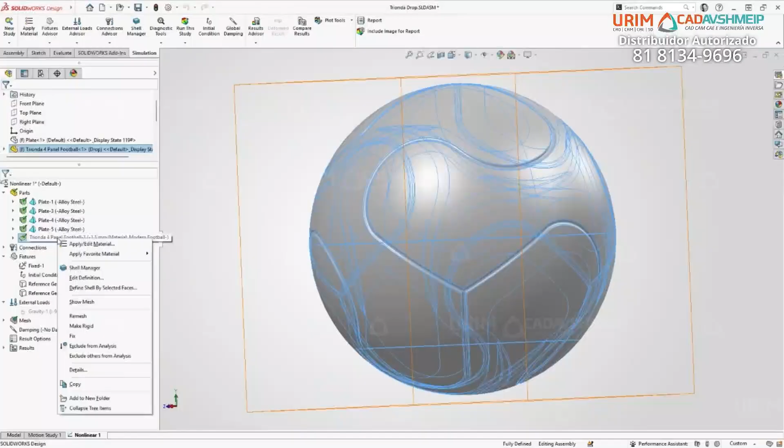The modern polyurethane ball and the dry, older leather ball share similar stiffness characteristics. But wet leather is a fundamentally different material. When leather absorbs water, it becomes dramatically softer, up to 5 times less stiff than when dry. The measure I care about is simple. How much of the energy from the kick does the ball actually return? A stiff ball gives it back. A soft one absorbs it.

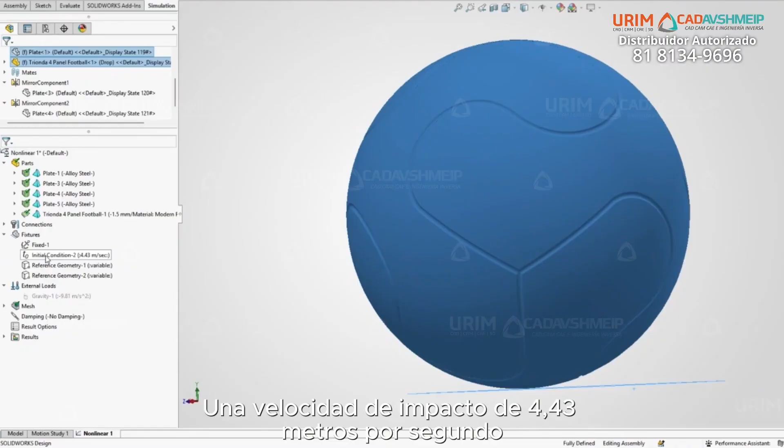This is exactly where SolidWorks Simulation shines. I'll set up a nonlinear dynamic analysis. The ball is modeled as a pressurized shell, the plate as a rigid body dropped from 1 meter, an impact velocity of 4.43 meters per second. 3 balls, 3 materials, same setup.

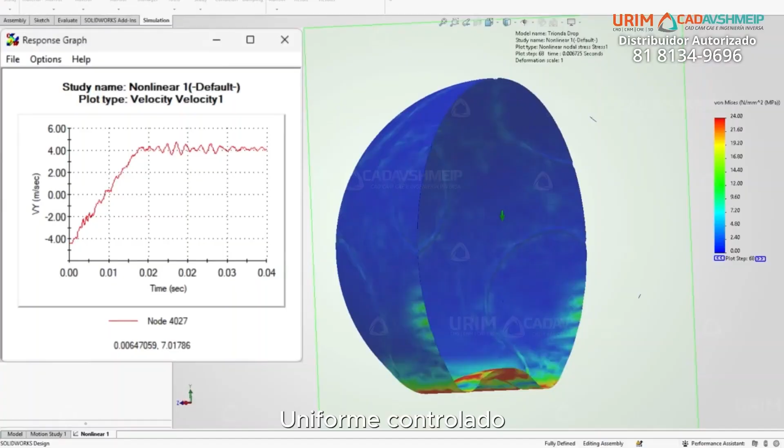Here are the results. The modern ball compresses at the contact zone. Stress concentrates cleanly at impact and distributes predictably through the shell. Controlled, uniform, exactly what you'd expect from a well-engineered ball. The dry leather ball from the 1930s tells a similar story. It holds its stiffness under load, and the stress distribution is comparable. Structurally, it holds up. But everything changes once the leather gets wet.

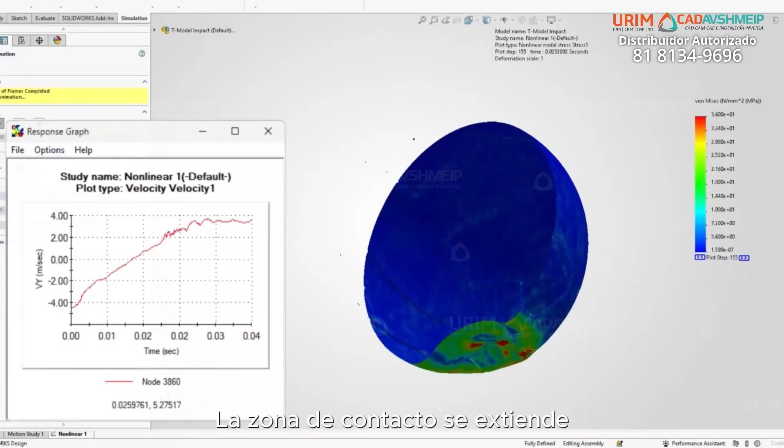Same geometry, same drop. The waterlogged shell yields far more. The contact zone spreads, and the stress profile tells a very different story. 3 balls, 3 very different structural responses to the same impact. The modern ball and dry leather ball stabilize quickly. The wet ball takes far longer to recover. The softened shell stores less energy and dissipates more of it.

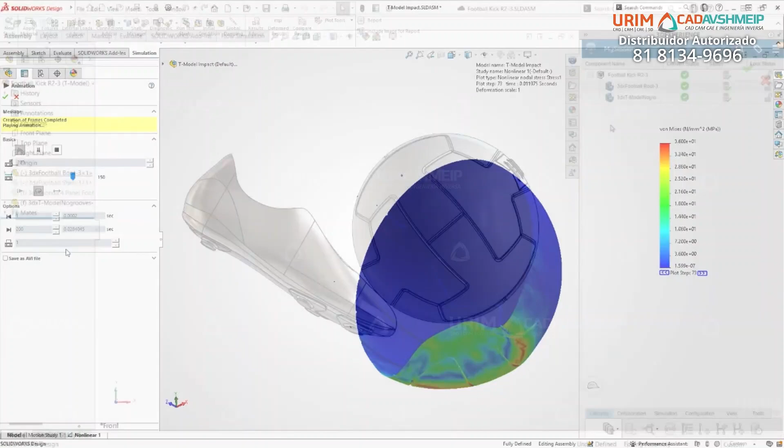The nonlinear dynamic analysis with SolidWorks gave really good insights. And now I want to investigate even more. As the complexity of the study increases, I need to leverage more compute power. The 3DEXPERIENCE platform gives me just this: high-powered cloud computing, the best meshing techniques available, paired with extremely powerful non-linear explicit solvers from Abaqus. I am stepping up from design analysis to full product verification.

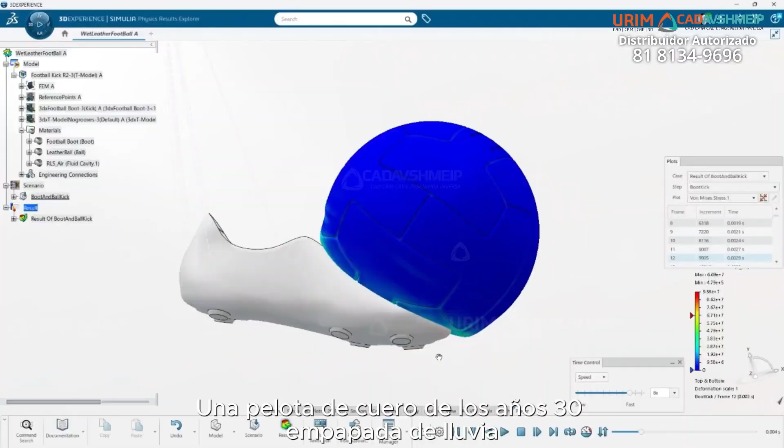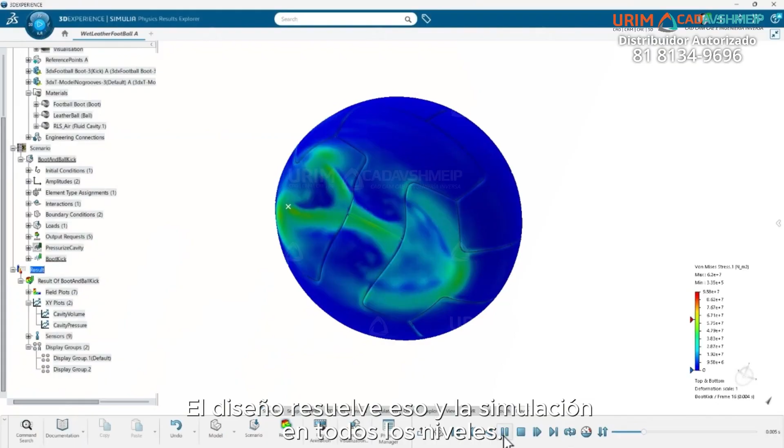A 1930s leather ball soaked in rain could weigh nearly 50% more than when dry, and perform dramatically worse. The results show how much energy from the kick is absorbed into the ball, making gameplay much slower and more difficult for players of the past. They were not just kicking a heavy ball, they were kicking a structurally compromised one. Design solved that, and simulation at every level is how engineering is done with confidence.

Seeing the evolution from early leather balls used in the 1930 International Football Tournament to today's advanced composite designs shows how improvements in material science, structural integrity, and moisture resistance didn't just increase the speed and action of the game, but also improved consistency, predictability, and player safety.

And this is from just a century of improvement. What do you think will happen to football in the next 100 years? I can't wait to find out, and maybe use simulation to test that out too.